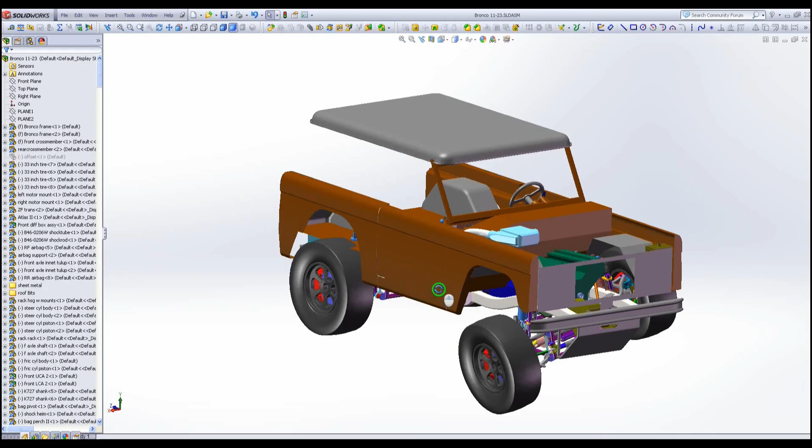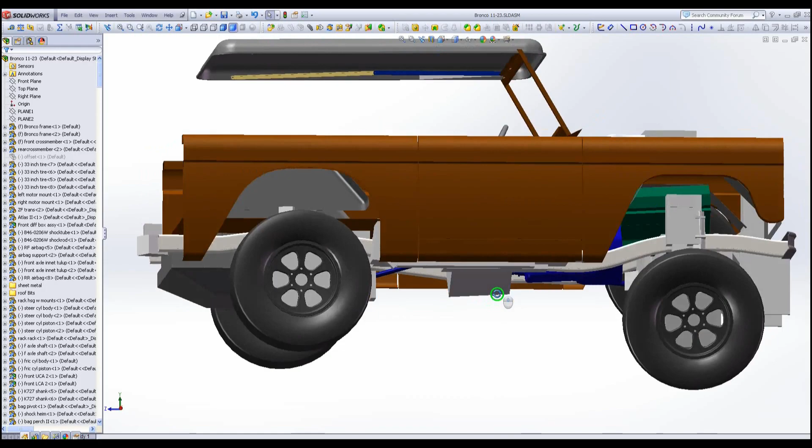So this is the CAD that I have for the Bronco. This project's been going on for many years, but I've been working full time, so I haven't had a lot of time to make progress on it. Some of you will recognize the CAD and the color of the Bronco out in the shop, and some of the suspension stuff. That doesn't just grow that way - I kind of noodle it out here and figure out where things are going to fit and what the suspension geometry is before I get too far.

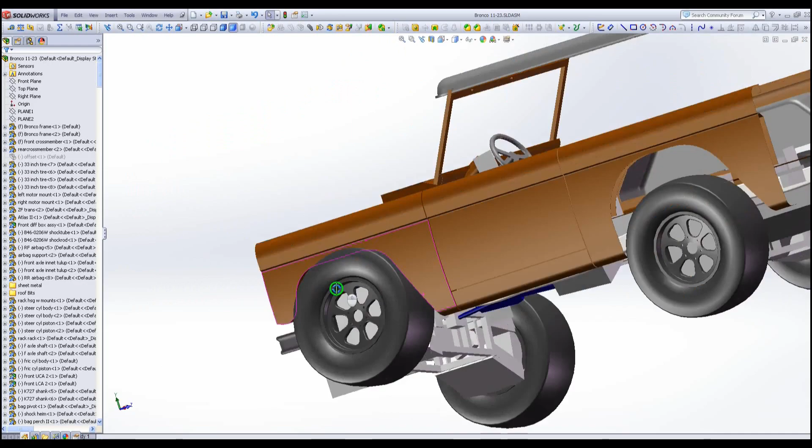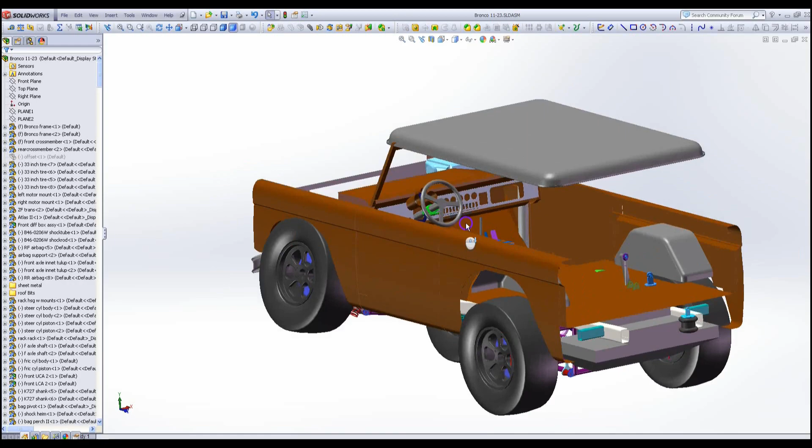So I'm going to kind of twirl this around a little bit, zoom in and out and kind of explain what I'm doing and why I'm doing it. Some of the stuff you'll recognize if you've been to the Batshit Bronco Facebook page.

There's some posts on there that I'll get into maybe a little later, but this is the gauge cluster - there's a post in there on that. This crazy shifter, I think there's a little video in there on that. Maybe I'll make those all into a YouTube video.

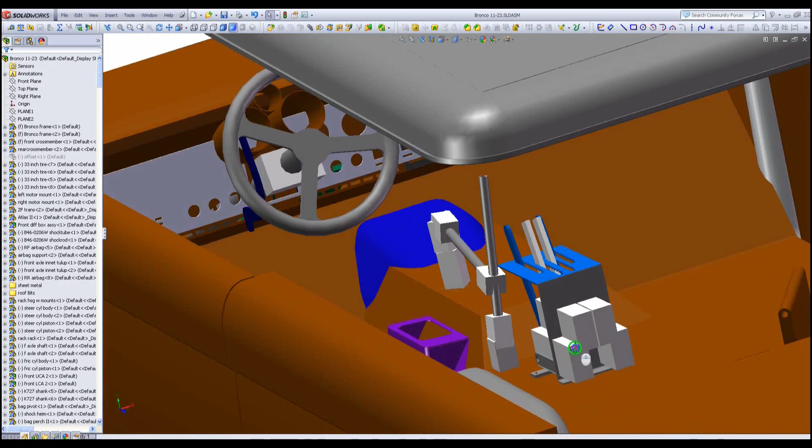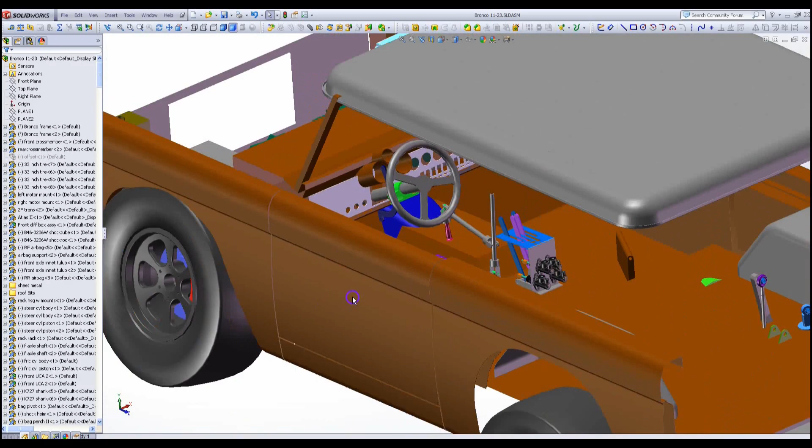Let's see, so I'm gonna just jiggle this around a little bit, kind of show all the pieces, and then I'll kind of take some of them out of there.

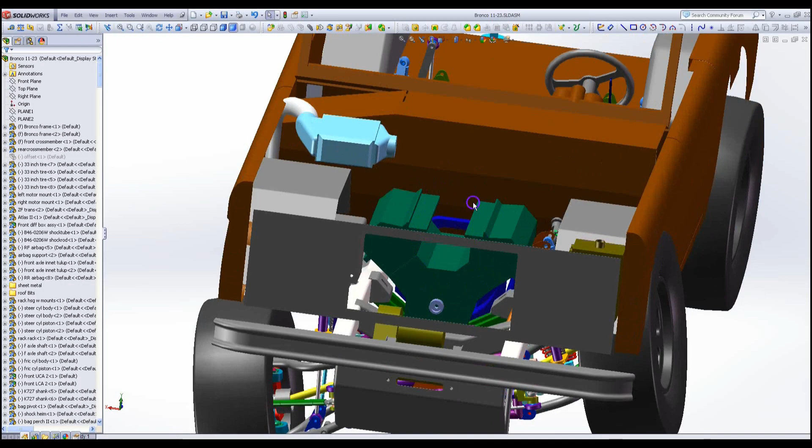This is a gross simplification of a 4.6 two-valve motor. There will be an Eaton supercharger on top of it, as well as a GT42 ball bearing turbo - not compound.

So the supercharger provides boost to the motor up to about 8 pounds-ish. As soon as it exceeds that, the only way it can exceed that is when the turbo kicks in - then the turbo will essentially be bypassed. There's a large throttle body in there that will just bypass whatever pumping the supercharger does, so there'll be essentially no pressure from the inlet to the outlet. It'll still spin, but it won't really do anything, and then the turbo will take over. So you get the efficiency of the turbo at high speed and boost at low speed. This thing needs both, right?

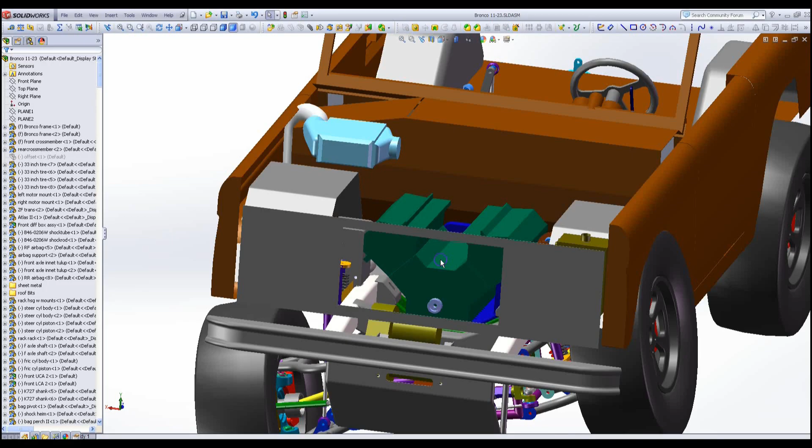You want a lot of torque at low RPM, so 8 pounds of boost at 1,000 RPM is nice for four-wheeling because you always have it on demand. But then you have all the heat generated with it. 8 pounds of boost with an Eaton is kind of pushing the limits of what it's really designed for - it's really designed for like 6 pounds of boost. So you lose 5, 6, 7 percent of efficiency depending on the speed.

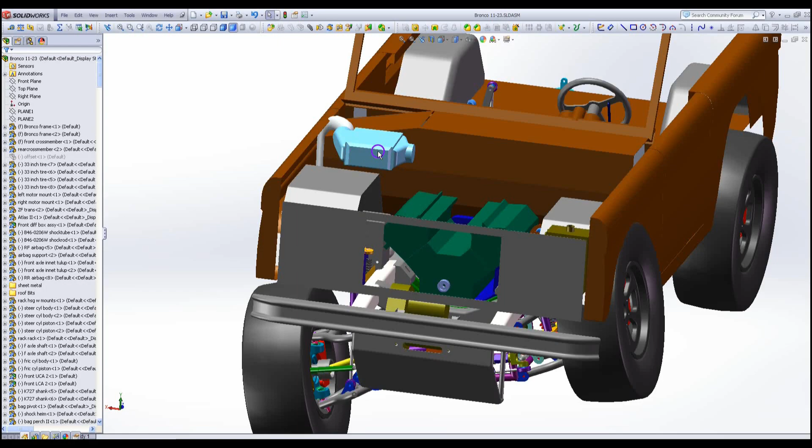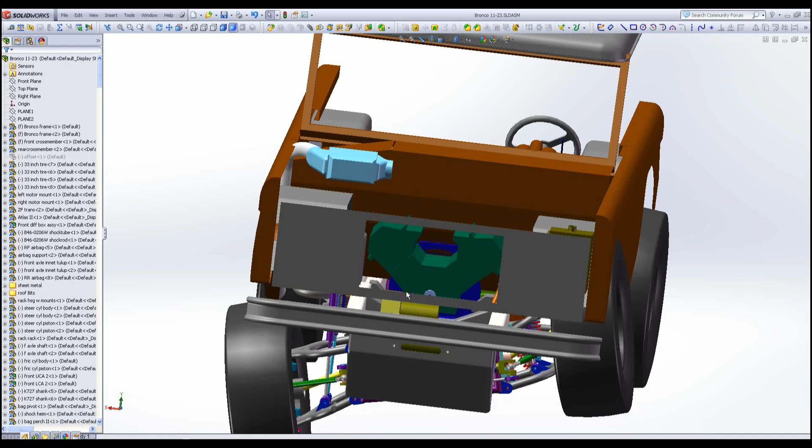Anyway, that's what that is. There's the intercooler there, it's liquid to air. There's also an intercooler inside the manifold - this is the charge air cooler for the turbo, and then there's another charge air cooler for the supercharger. When the turbo is working, it'll go through them in series - pre-cooled by this, then through the intake and cooled by the second one as well. No additional heat will be generated, or very little, by the Eaton supercharger.

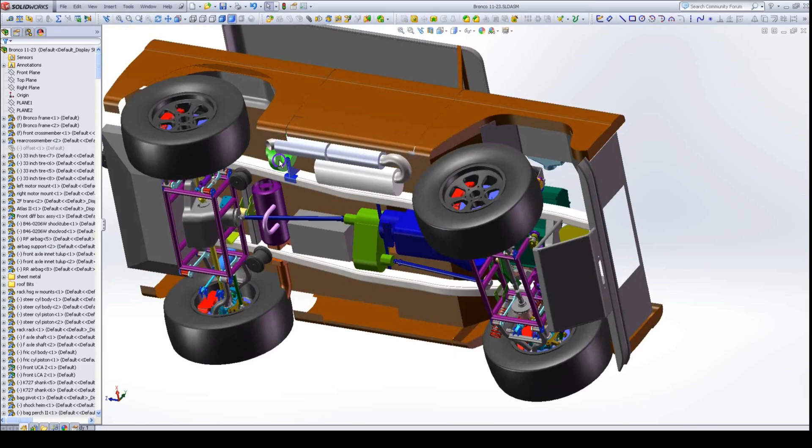I don't have the turbocharger drawn in here because I don't have a good model of it, but that's essentially there's the mount for it - I had to make the mount. So that's the mount for the turbocharger.

This is a simplification of the compressor housing. This is what the exhaust looks like - it's already on the car. This is the air filter, obviously the differentials. The differentials are approximations, transfer case approximation, transmission approximation, right, otherwise the model gets super heavy.

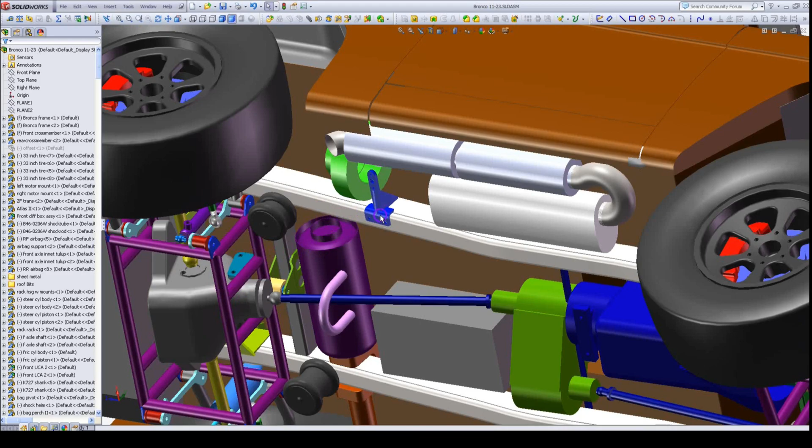Yeah, so I don't know what else we want to zoom in on here, but suspension is pretty unique on this. Some of you will recognize the dashboard. Let's just start hiding stuff here now - get rid of that roof.

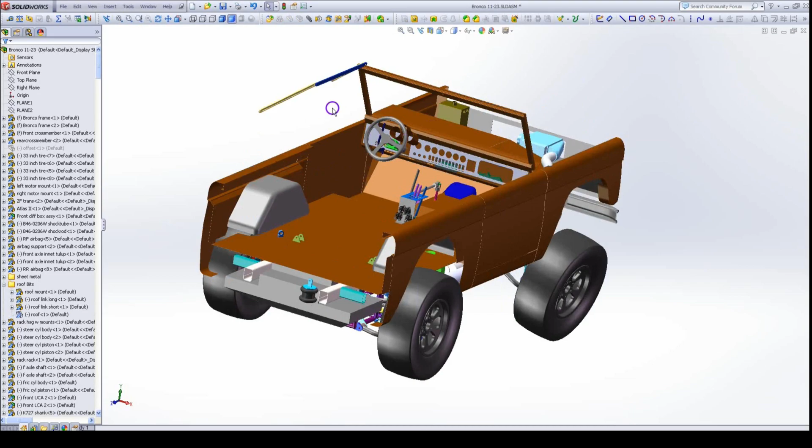Turn this all on later. So yeah, dash panel.

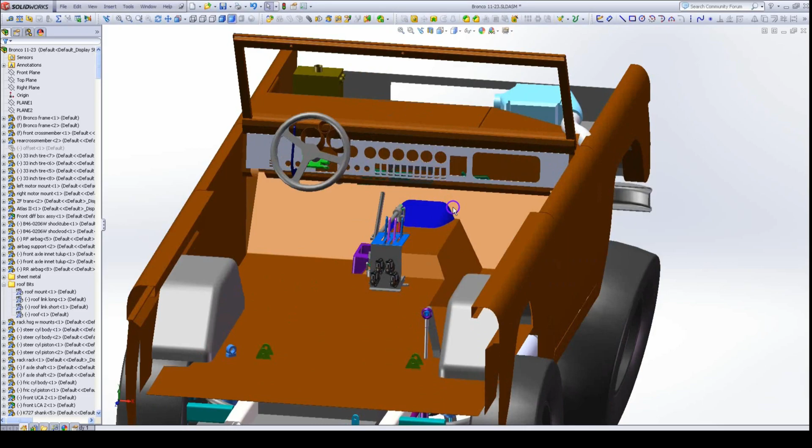So the dash - what I've done is taken the original dash, gotten rid of this cluster over here that sucks because it's kind of really far out of view, and the gauges are tiny on it, and you got to look between the steering wheel and tilt. Yeah, it's just terrible, right? It's one of the worst things with the Bronco.

So I put normal gauges in here, so there'll be oil pressure and speed and RPM here, and then other ancillary gauges - boost and whatever, amperes and volts and yada yada yada. I've also left a bunch of rocker switches for winch stuff and lights and crap like that.

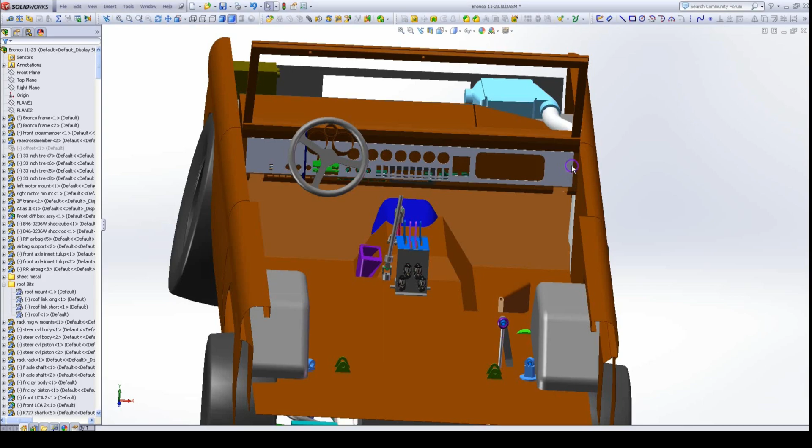I've moved the glove box door over, because one of the major problems with Broncos is when you put a roll cage in it, you can't open the glove box door or the wing window. So I moved the glove box door over, and then the roll cage will be in a more appropriate position.

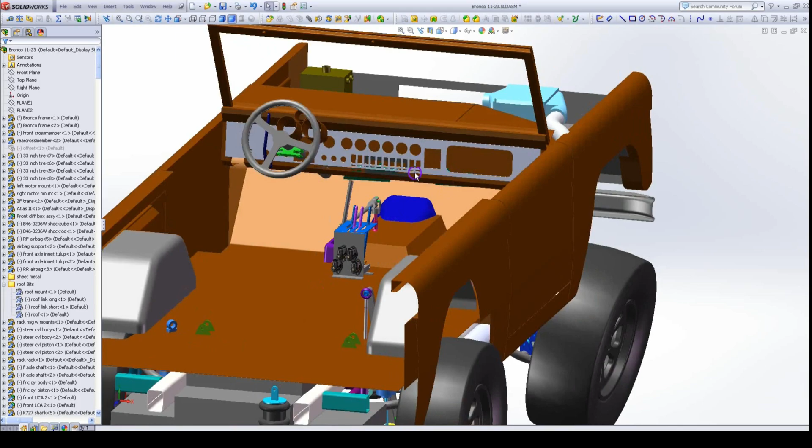So you can open the wing windows. Those are a nice feature of older cars that I don't know why people got rid of, but I like them. I also have some USB plugs for charging phones, and this ashtray is like a cubby for cell phones and packs of gum, whatever you want to stick in there. It's just like a little cubby, no door.

So yeah, let's get rid of the body because that's hiding all the interesting giblets. Again, this is just a simplification of what the real body panels look like.

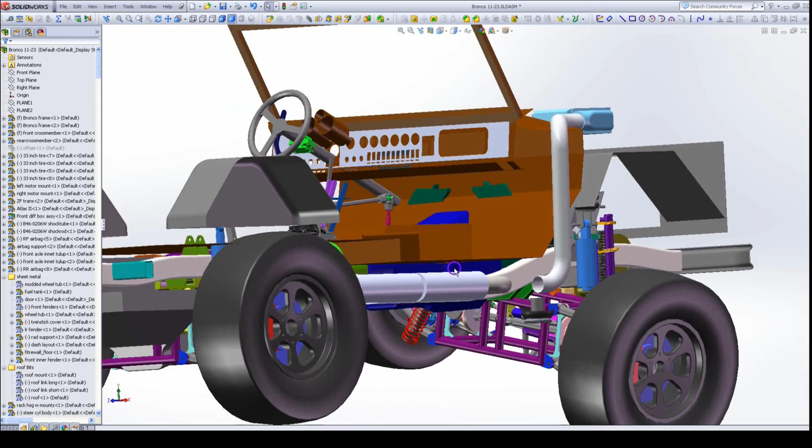One of the other things I've done here, I'm not sure where they're hiding, but I'm using the skid plates as like there's a 3-inch, 3.5-inch OD tube, quarter-inch wall tube going along each side, and one of them's an air inlet, so it'll feed air if you're doing heavy-duty four-wheeling in a lot of mud. It has an air filter mounted up high that feeds air to the air filter down here.

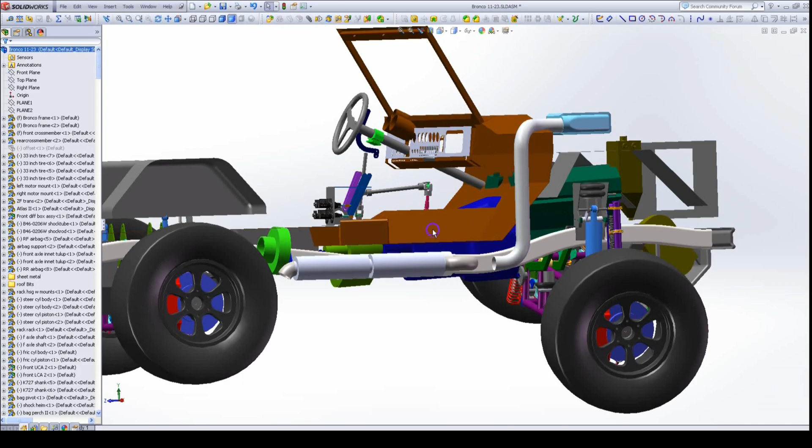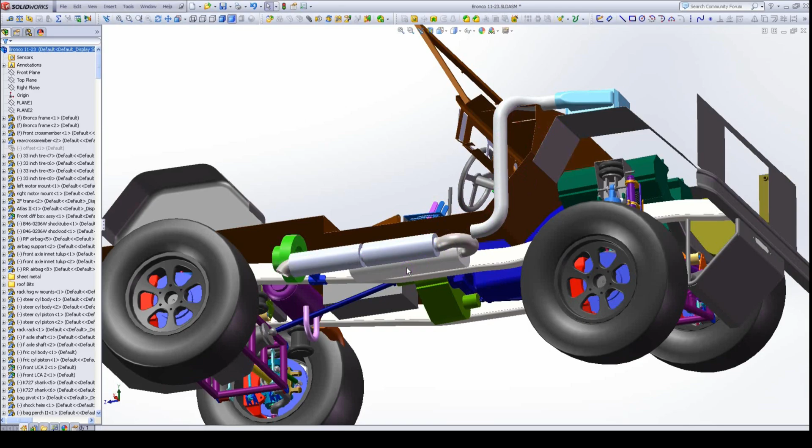This purple thing is the air filter housing, and that feeds into the inlet of the compressor, and then the outlet of the compressor goes to the other skid plate or rock slider, and then it goes up to the intercooler. So that's what that is. So I can delete the intercooler now, at least hide it.

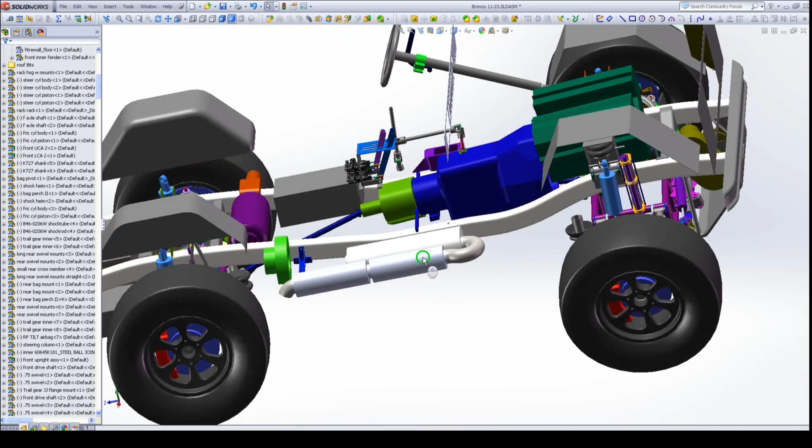We don't need all this. And let's not worry about this guy, that probably won't happen. Okay, so now we just have a dashboard, and get rid of some of this fender stuff.

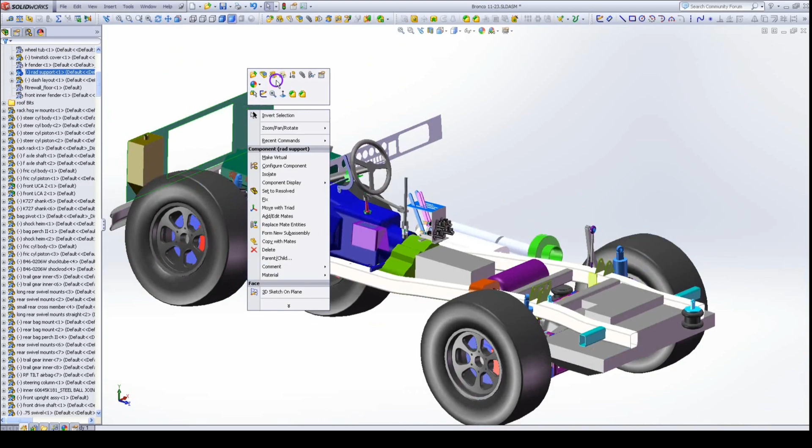All right, so now we're getting down to the nitty gritty. Get the core support out of here. One of the things, if you've already done any serious four-wheeling, you get the vehicle on a pretty crazy angle, and all you hear is tick, tick, tick, tick, tick. That's because your engine's starving for oil.

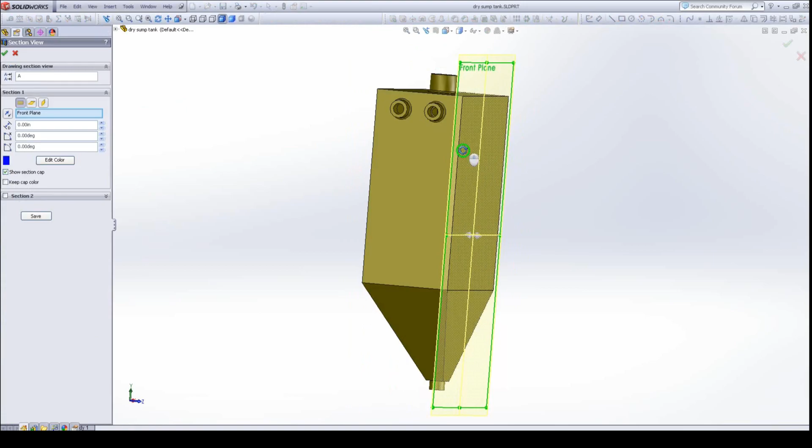So this here is a dry sump tank. This is already built as well. Just open that assembly up. Open. So it has a series of baffles and stuff in here.

So this is just a filler, for the oil. This is the inlet, so the oil comes up through there and then goes to the dry sump pump, which is inside the motor, and then it returns it back to here, and this has a bunch of time to let the bubbles settle out of the oil and go back to here. So this is my own design based on, I don't know, how gravity works and stuff.

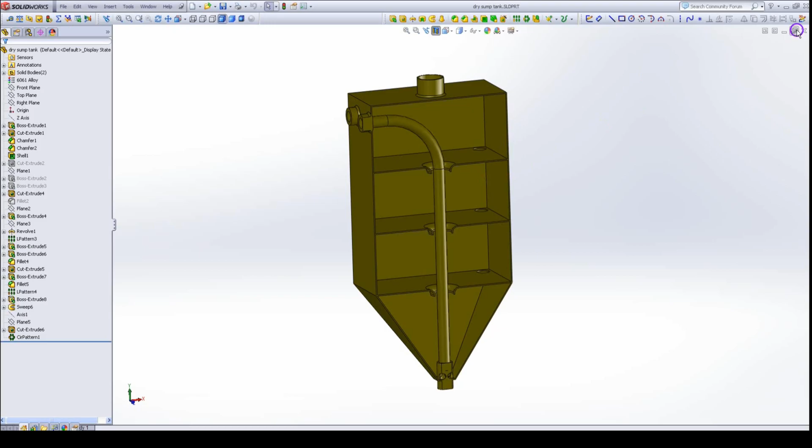I've had that problem on vehicles I've owned and done four-wheeling with, and some that I haven't owned. So sorry about that, A1 Used Cars. My buddy used to work at a used car lot, and one weekend he decided to bring an International Scout home, and we took it up some pretty gnarly trails, and it came back kind of broken. Put it back on the lot, made believe we never borrowed it.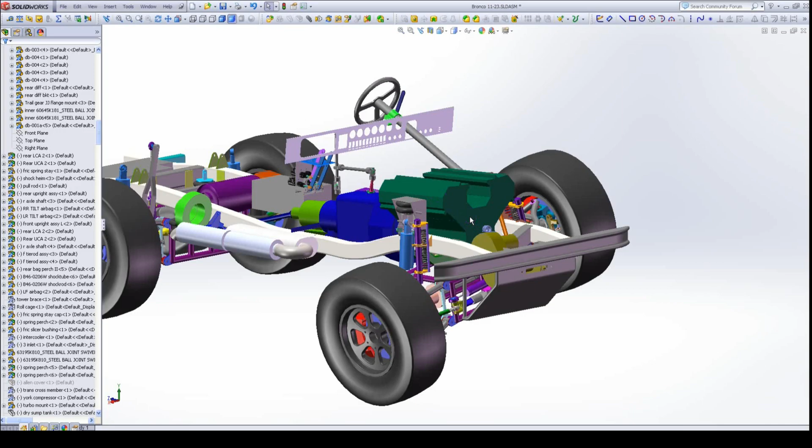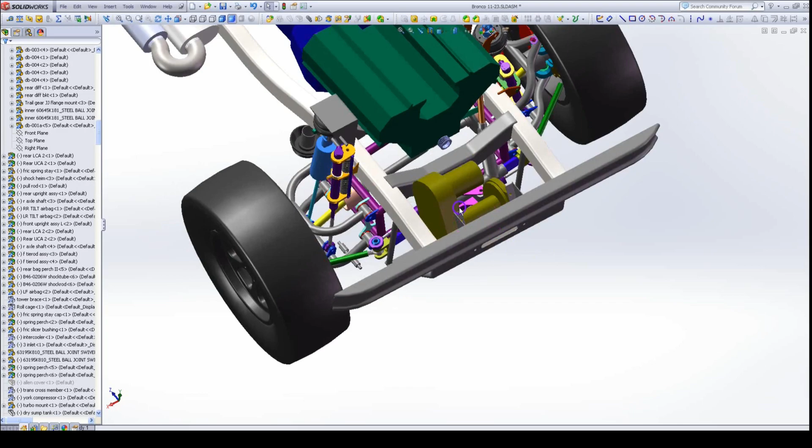So this is an old school Warn winch. I kind of like these, they're kind of built tough. I had one on my Bronco, and instead of letting it hang out of the front and screwing up the CG and bouncing into rocks, I kind of hid it inside here. So that mount is done.

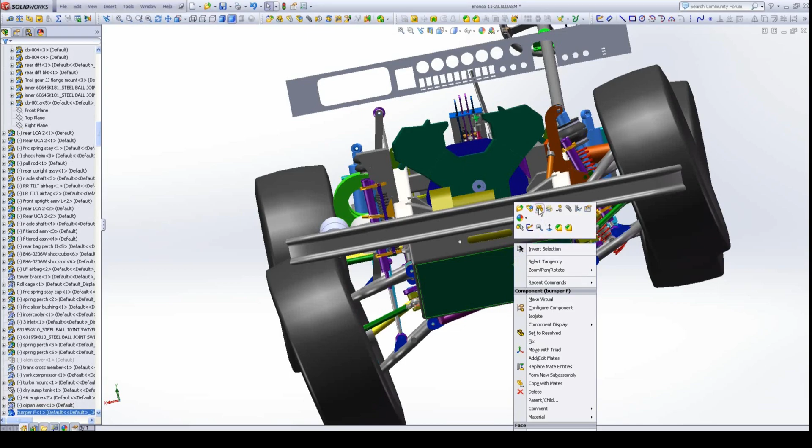I still need to make this guy here, kind of a bash guard. It hasn't been made yet, but I know what it looks like. That guy, hide the winch.

Okay, now we're getting into the nitty gritty. Let's hide this motor, because this is like a little adapter that drives the onboard air compressor. So this is what the front suspension looked like, and the rear is very similar.

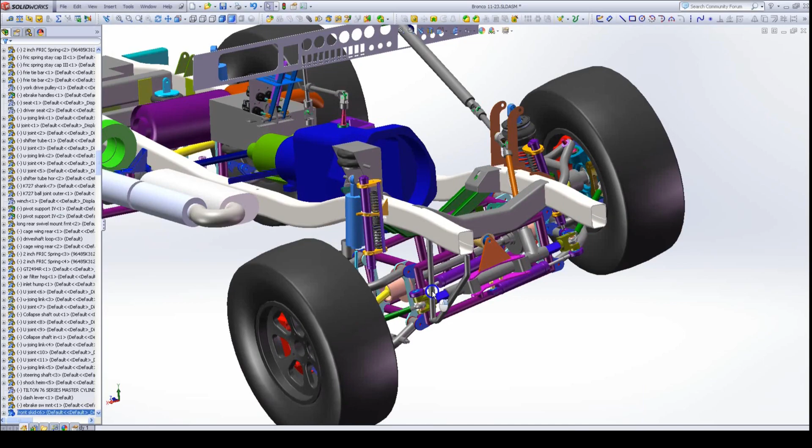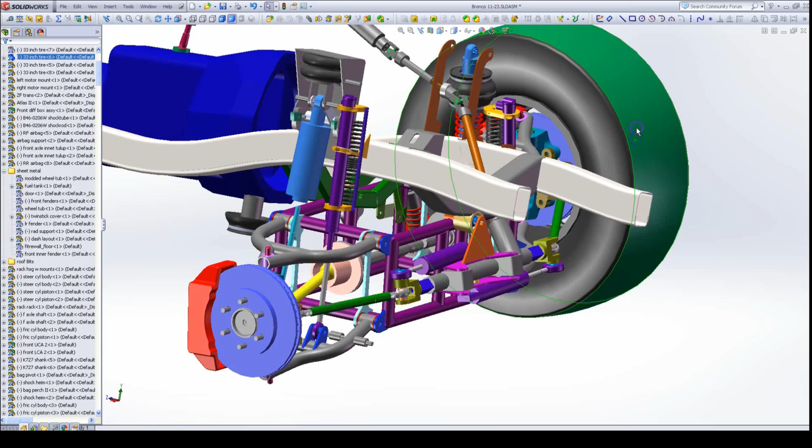So we'll get into the front, and yeah, I'm sure there'll be some questions and comments. Yeah, a lot of stuff happening here. So let's kind of hide - everybody knows what a wheel and tire looks like, so I'll hide those guys.

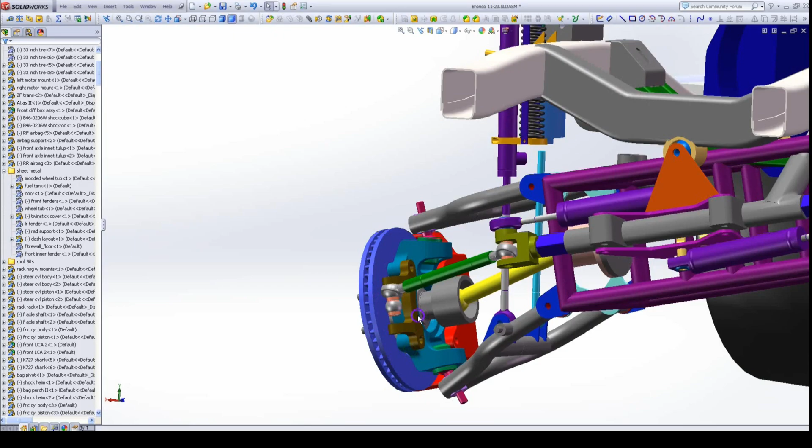So these are Audi or Porsche Cayenne brake calipers. These are Ford F-150 rotors, and this unitized bearing is from an F-150 as well, as are the axles.

Except for, the Bronco's quite a bit narrower, so it's probably going to have a little bit shorter axle. There's two lengths in the standard, and I'm going to try to use one. I'm trying to use the short one, but I think it's still going to have to be a little bit shortened.

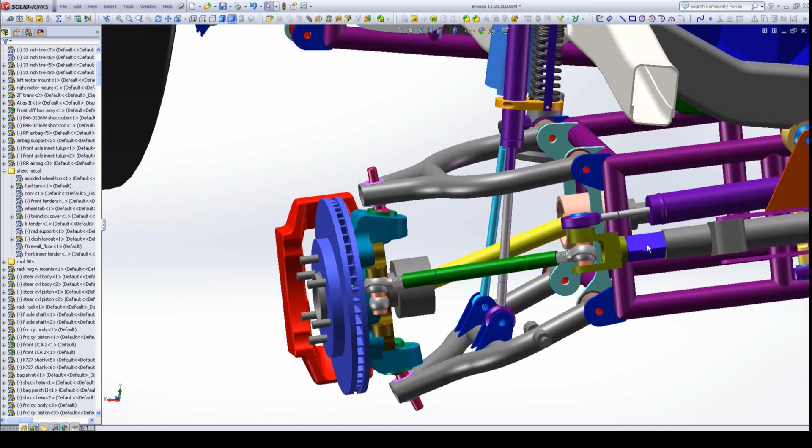Let's go back to the general design of this thing. So instead of having a live axle, I have an independent suspension that's mounted to what I call a diff box. The differential is mounted in this purple box here, and this purple box rotates relative to the frame. Then all the suspension arms are attached to that. So when you're just driving on the street, not doing any articulating requirements, you have an independent suspension.

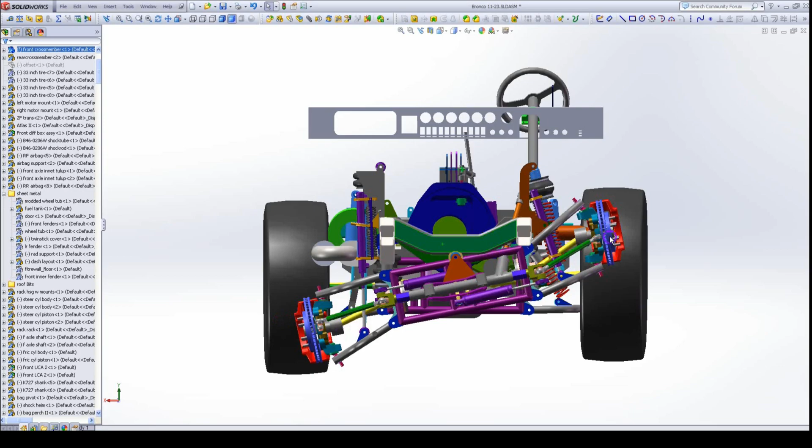You have, I think, about 8 inches of travel. It's been a while since I've looked into the details of it. So you have 8 inches of travel with this thing articulating zero. If that was just locked to the frame, you'd have 8 inches of travel, which is not terrible, but not great either. But when you start doing rock crawling or something where you need to flex, this box can rotate, and it looks like it's rotated about its maximum position here, where it's just getting close to the frame, and it's not that much - it's like 11 degrees or something. It's not a big number, but 11 degrees over a 7.5 foot wide vehicle gives you a lot of extra articulation.

So that's the concept that I'm using here. I get the ride quality and all the benefits of an independent suspension without the detriments, right? We still can flex a lot and have a lot of articulation.

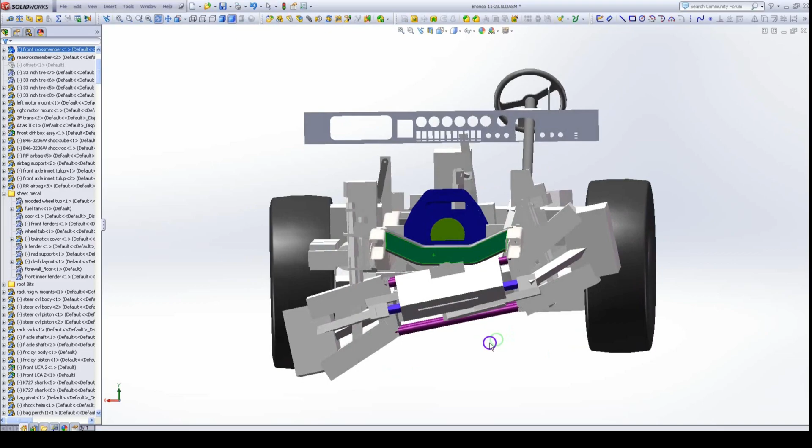There's also some challenge with it, of course. Your steering - there's a rack and pinion steering, so that's mounted to the diff box as well. There's the steering shaft going to it, so this has to plunge, right? The steering shaft has to plunge, which is pretty normal for a steering shaft to do, but this has to plunge a lot now.

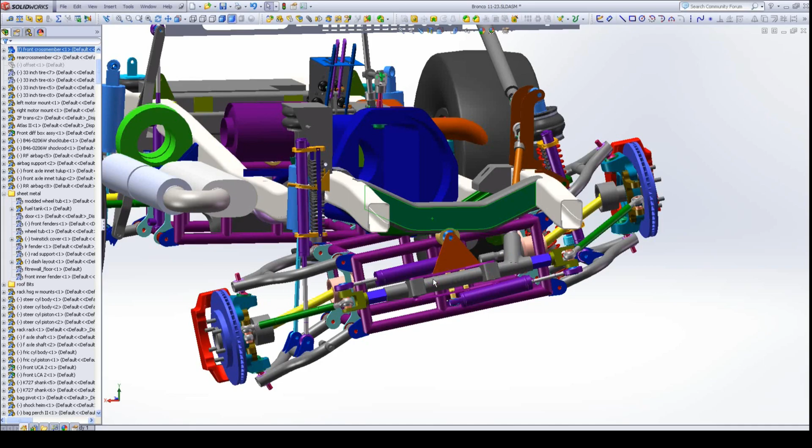Instead of using the steering box to take all the forces from the sides of the tires, which typically is a failure point, I have some hydraulic cylinders in here. There's actually spool valves inside here. If you don't know what a spool valve is, it's basically a torsion bar on a valve. So as soon as you put some steering effort into the steering wheel, depending on which direction you're applying torque, it opens holes a different amount. It either puts fluid to this side of it or this side, and this whole steering rack is the hydraulic cylinder.

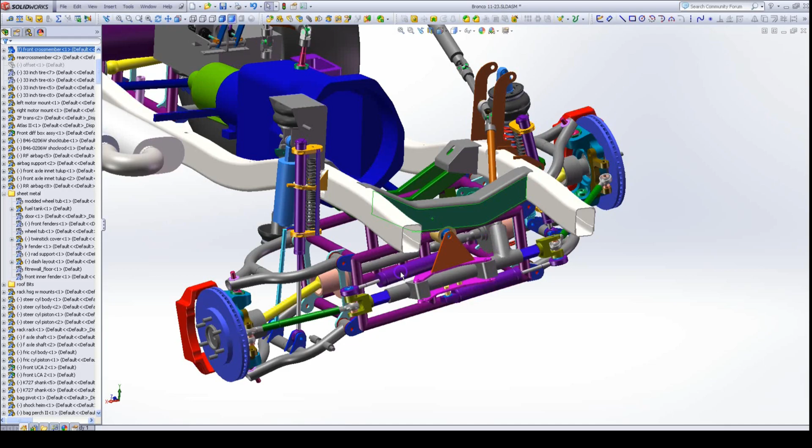So I'm just using the spool from the steering rack, and there's external lines that run anyway, so I'm just running those external lines to this cylinder and to this cylinder. The hydraulic pressure from the power steering pump goes into the power steering rack and pinion, and then it goes to this steering rack or this steering rack, which is now a hydraulic cylinder. That's connected directly to - I used to use an NX at work, so this mouse is backwards, but anyway - it puts the load right into where the tie rod is.

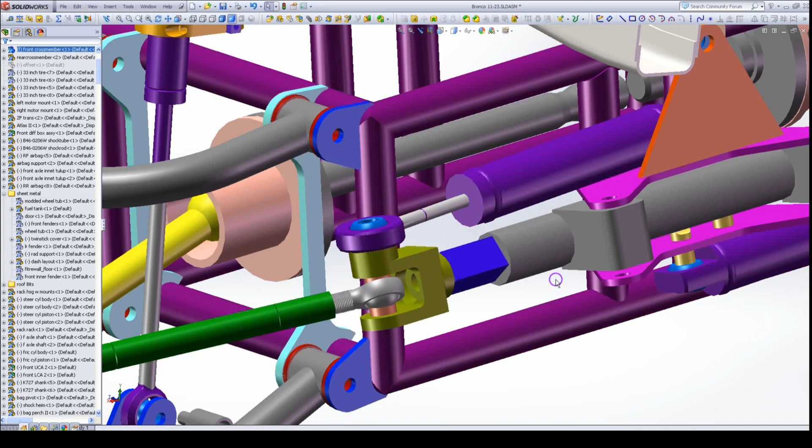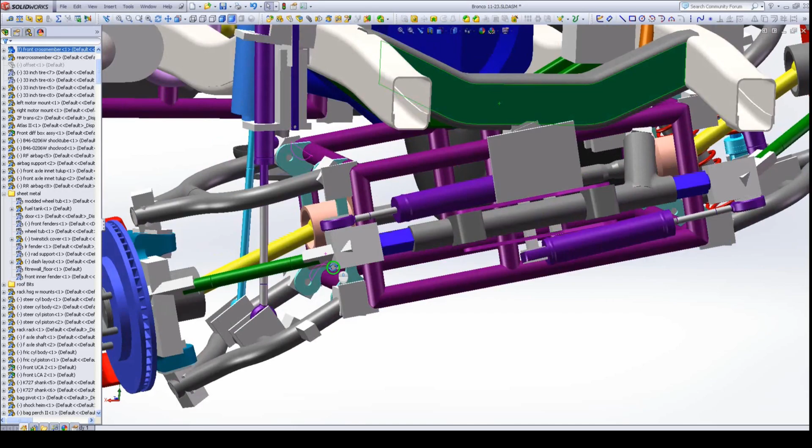So all these parts I've had to fabricate, and most of this stuff is built now. I have these cylinders, I have the rack. I shortened one side of it because it used to be offset, and now it's less offset. So that's the basic gist of the suspension.

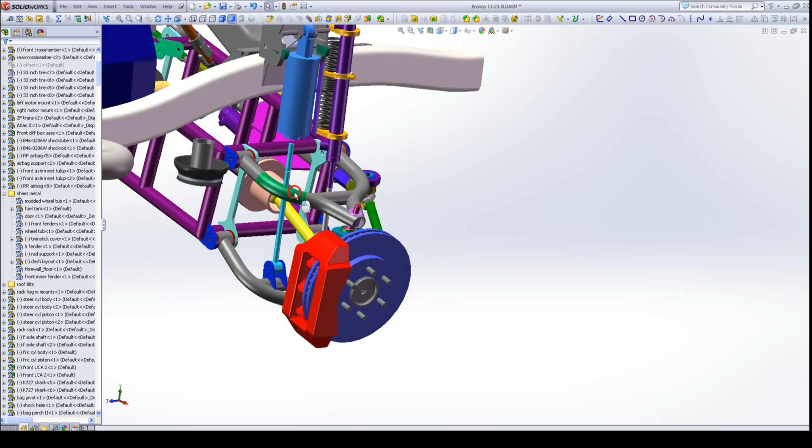Well, there's a lot more. You notice there's a whole bunch of springs and shocks and things laying around here, so we'll get into those as well. It looks like I'm a little bit far out of my travel here.

Another interesting piece of information that many of us know, many of us don't - when you're driving on the street, you want a fairly stiffly sprung vehicle. Otherwise it's not very stable at high speeds, it's big and floppy. Typically, if you make a really hardcore wheeling machine, you put some really light springs on it, 100, 120 pounds per inch kind of springs, super soft. I don't know if you ever watched the stadium super trucks, but those things lean and pick up tires and stuff because the suspension is just really soft.

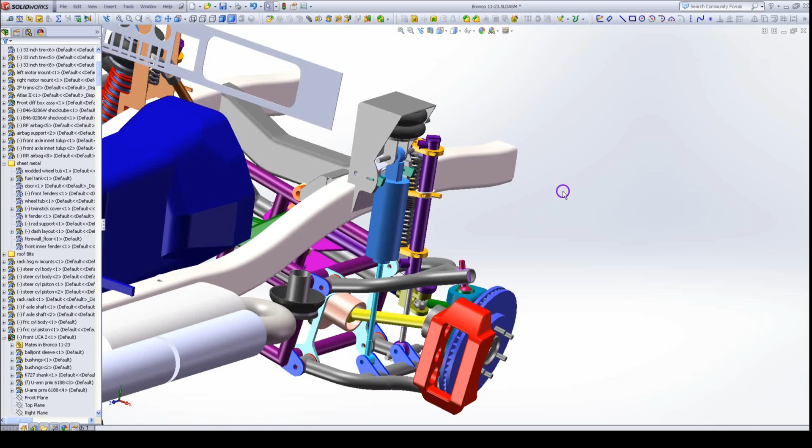And that's not good for the street. It's good for off-roading, good for articulation, good for absorbing big whoop-de-doos. But really, what you want is to flip a switch and have a soft spring when you're off-roading, or flip a switch and stiffen it up for when you're on the street. So what I've done here essentially does that, and changes the ride height at the same time. Actually, that's an older version of the design, and this is the current design, so ignore that other side.

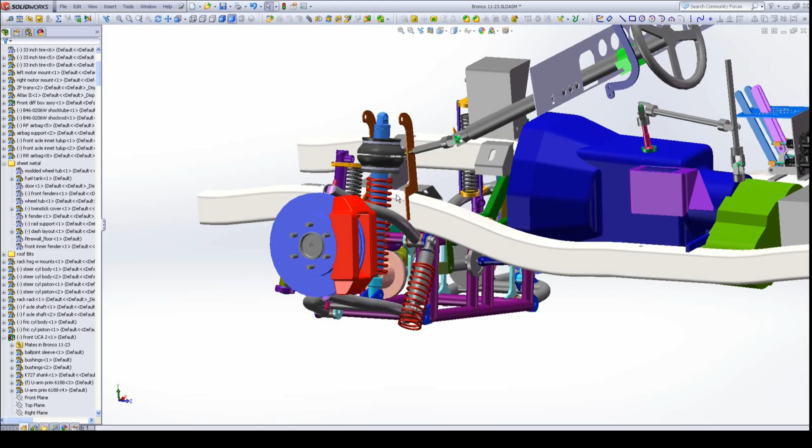Let's go down out of the way a little bit. So basically, how this works is...

This is an airbag, but it's made for a strut suspension, and this is a Fox coilover, 14 inches of travel I think, and it has the springs in series. This one has a built-in bump stop, so this air spring has a bump stop built in.

Basically, when you're on the street, you just let the air out of this airbag, and then this just acts as a solid block, right? It's not part of the spring-in-series solution. All you have is this spring right here. So you can make this spring fairly stiff, right? This could be 400 pounds per inch or 350 pounds per inch.

I have a spreadsheet somewhere that says what I'm going to start off with, but it doesn't matter, it can be stiff. It could be enough to cruise along 80 miles an hour and you're not worried about a little gust of wind tipping you over.

And then when you want to go off road, you fill up the airbags, and then now instead of this spring acting on its own, you have this spring and this spring in series. The way springs add is if this one's 300 pounds and this one's 300 pounds, it's the addition of the inverse of that. So let's say, to make the math easy, if this was 200 pounds and this was 200 pounds, you put two of them in series, now it's 100 pounds.

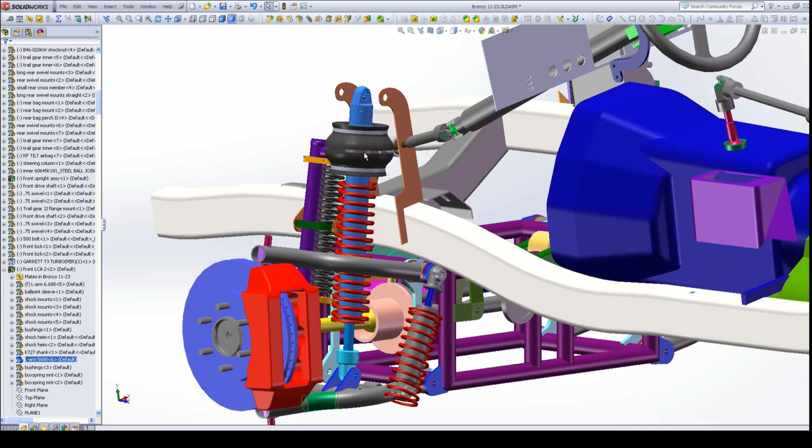So that's what I've done here. Not only do you get a higher ride height when you're off-roading, but your spring rate essentially drops in half or less than half, depending on the air pressure in this. So that's a nice little benefit - you get both at the same time. Put some air in this, it raises the ride height. For off-roading, you get more ground clearance and more articulation, but you also reduce the spring rate.

This spring, I'm not sure why that's in the wrong spot, but links... this spring's sole purpose is to keep this diff box centered.

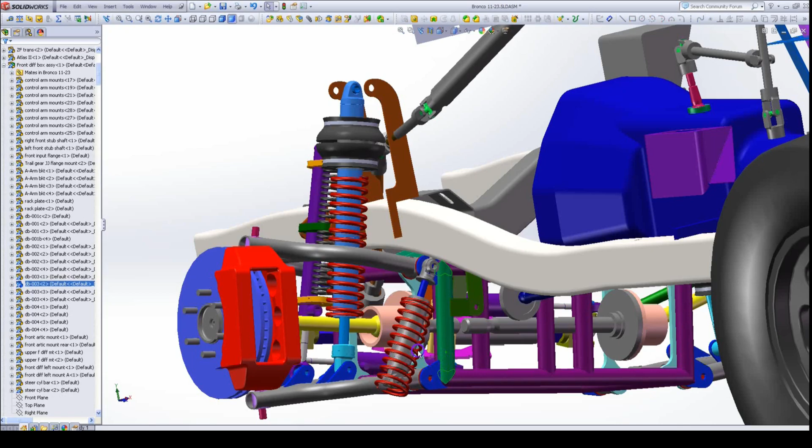So it's like a righting spring, very light spring, but you have to have something to keep this diff box so it doesn't just kind of meander this way, that way, the other way. So that's 4 of the springs.

You'll probably notice that there's some other springs in here as well, and another cylinder. So this is a FRIC cylinder.

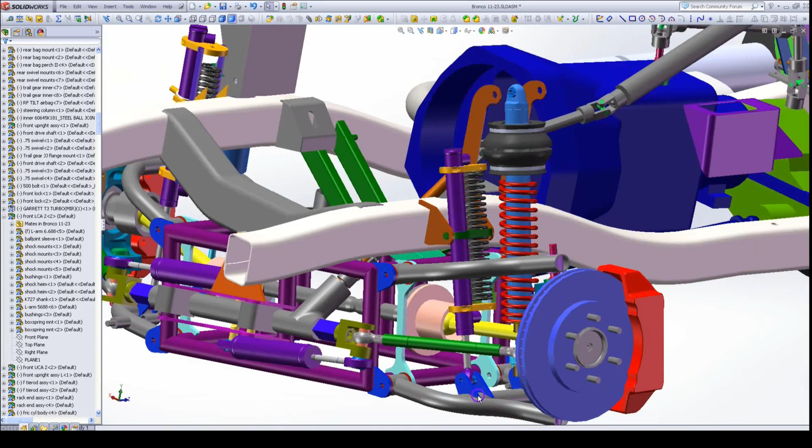And yeah, I'm sure there's some blank stares going on right now - what the hell is a FRIC cylinder? Well, front rear interconnect is what it stands for.

So basically this is a hydraulic cylinder, and there's another one on each corner, but there's another one that has hydraulic lines running from this one to - this is the left front, so the right rear is its partner. So front rear interconnect, but it's diagonally interconnected.

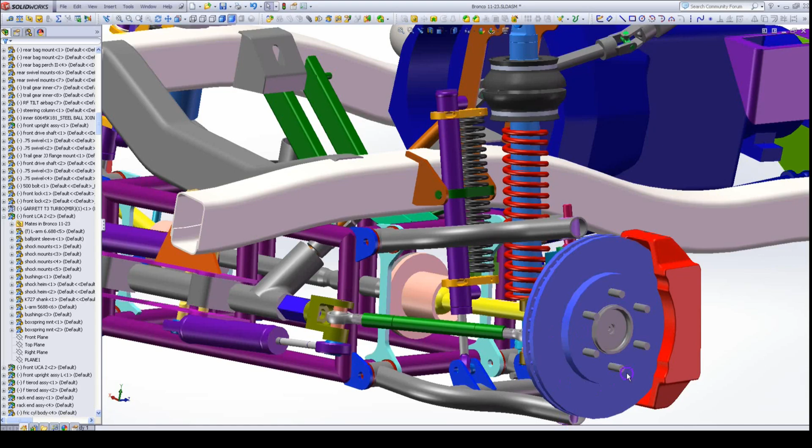So what happens is when this wheel bumps up, it pushes fluid through this, and then that fluid goes to the right rear wheel, and it pulls it up. So when this one goes up, it tries to pull the opposite corner up. When this one goes down, it tries to pull the opposite corner down.

And if you think about how that would work as a system, it works when you're trying to articulate over - like you have sway bars still, right? So if you're trying to go around a corner on the street, this one's trying to compress, so it tries to pull this one up. This one's trying to compress, so it pulls this one up. So basically all you get is a lowered ride height. It works just like a sway bar, except they're coupled diagonally.

So when you're doing acceleration or braking, you get anti-dive and anti-squat, right? If you're putting on the brakes, the left front is trying to go up, which is going to pull this one up, and this one's going to try to go up, and it's going to try to pull this one up. So you get an anti-dive scenario and you get an anti-squat scenario.

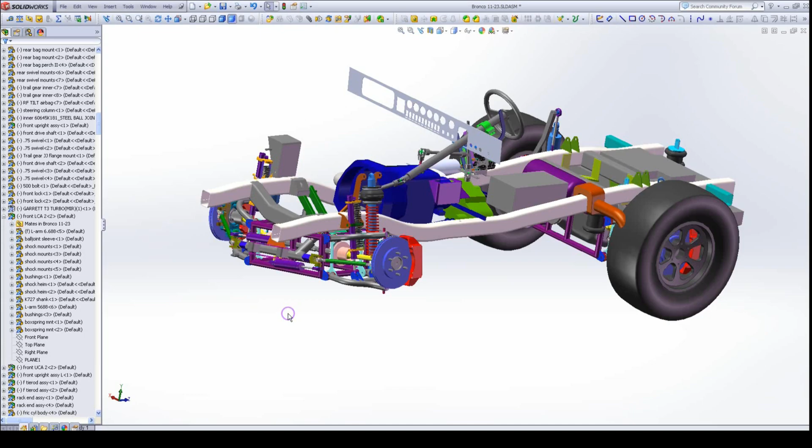So I don't know why everybody on the planet doesn't do this, because I think it's just expensive, but that's what I'm going to do.

So that's what these springs and shocks are for. It needs springs because if you didn't have a spring and only had hydraulics, it would be a one-to-one movement. If this moved an inch on the left front, then the rear would have to move 1 inch. It would be mechanically coupled, like having an infinitely stiff sway bar, which obviously doesn't work. If you have an infinitely stiff sway bar, you might as well have infinitely stiff springs.

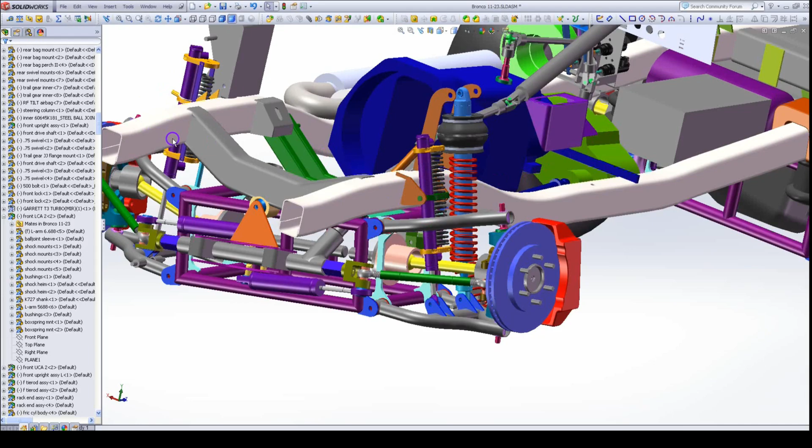So these coil springs are acting like the twisting of the sway bar, which is why you only need them on one end. The rear doesn't have these springs, it just has the hydraulic cylinders. That's how the fric works.

The rear suspension is very similar, except instead of the fric cylinders being mounted the same direction, they have to be opposite, because you have to put fluid...

The way hydraulic cylinders work is there's a piston that's, say, an inch, and then on the opposite side where the rod comes through the seal, say that's a half-inch rod. Now you have a 1 inch cylinder minus the area of that half-inch rod, so the ratio isn't the same from this side to that side. So if you wanted similar travel for the same fluid, you have to make one a pusher and one a puller, or you have to have a seal on both ends.

You'd have to have a seal on the top and the bottom, front and rear, and I didn't want to do that because that seal creates another leak path. Plus there's a big rod sticking out of it that would poke through the hood and stuff. So that's why I didn't do that.

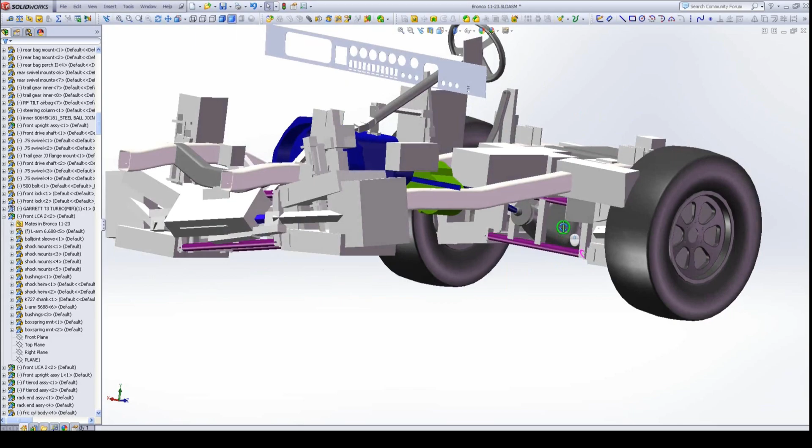So that's the 5-minute tutorial on what I'm doing and why I'm doing it. The devil's in the details, of course.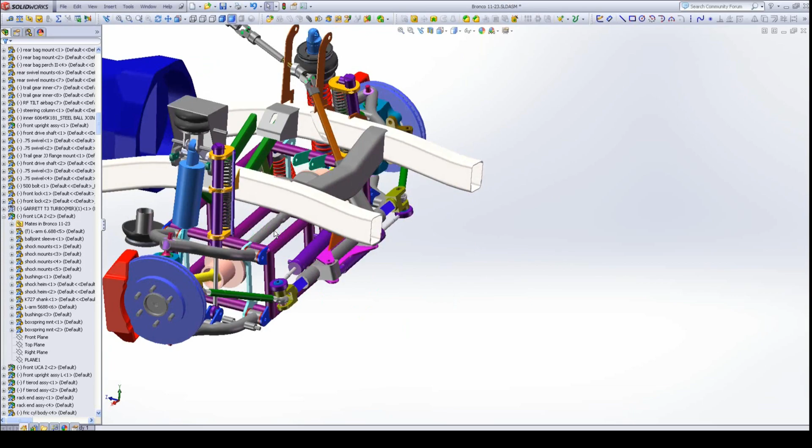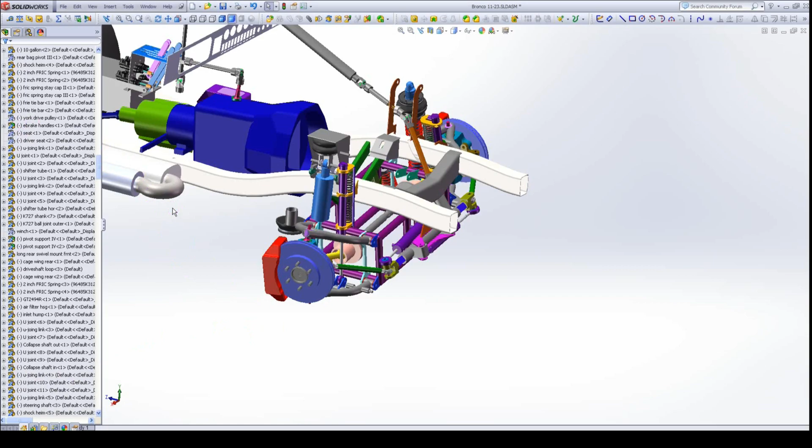This one has a differential, an 8.8 Ford differential. I think I have a picture of it in here somewhere, a representation of it. Anyway, not sure where it is, but the rear is a 9 3/8, I think, like a Sterling Ford differential.

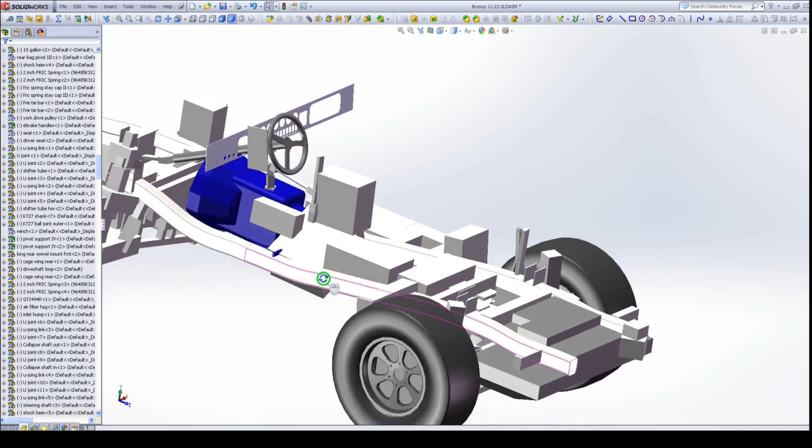Same deal with the airbags though. It has the same shocks, it has airbags. Very, very similar, just the packaging is different.

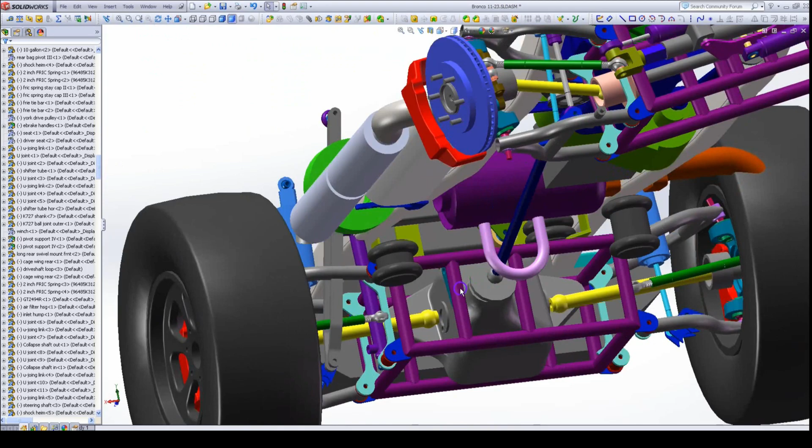This is not ready for prime time. There's a lot of ideas that get chopped up and thrown in here and then discarded, so everything you're seeing is not real yet.

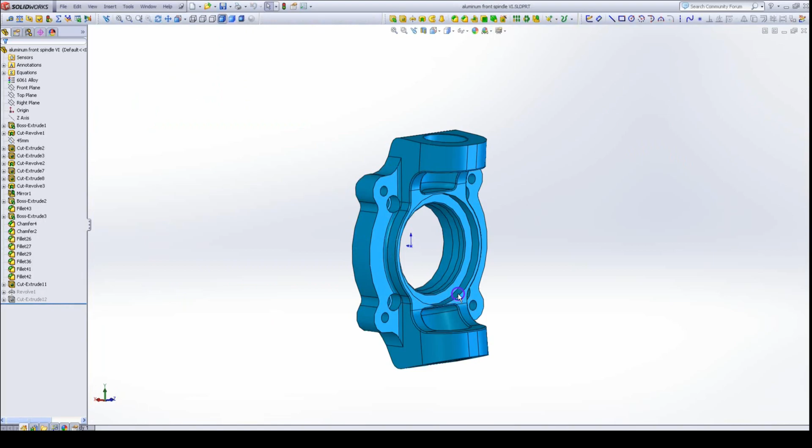One other thing I should mention is these uprights are not something you can just buy. This upright is a custom piece, so I have to make these or have them made. But I've already done the analysis on them, with a factor of safety of like 4, so it should be fine.

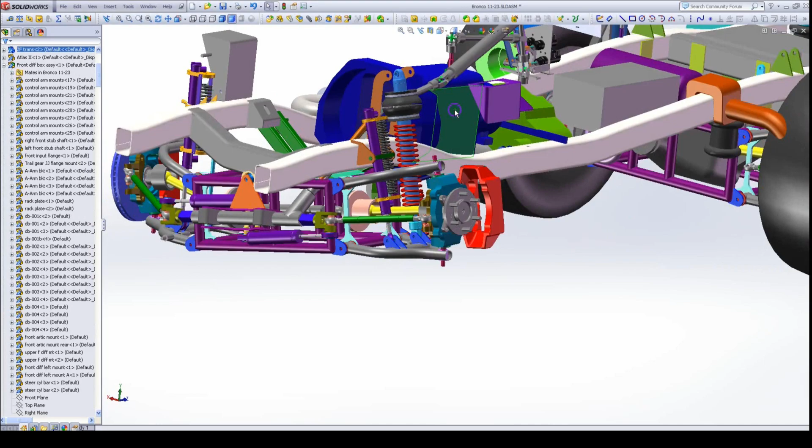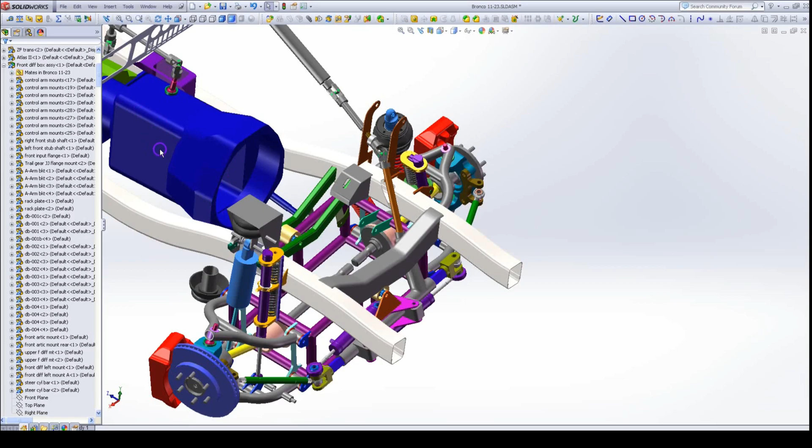Stock frame. This is a ZF transmission, a 5-speed manual, originally intended for something like an F350 with a V10, but modular motors have the same bolt pattern - 4.6, 5.4, 6.8 are all the same pattern - so I got this transmission from a V10. Should be plenty for what I'm doing with it.

This is an Atlas transmission, or transfer case, Atlas 2.

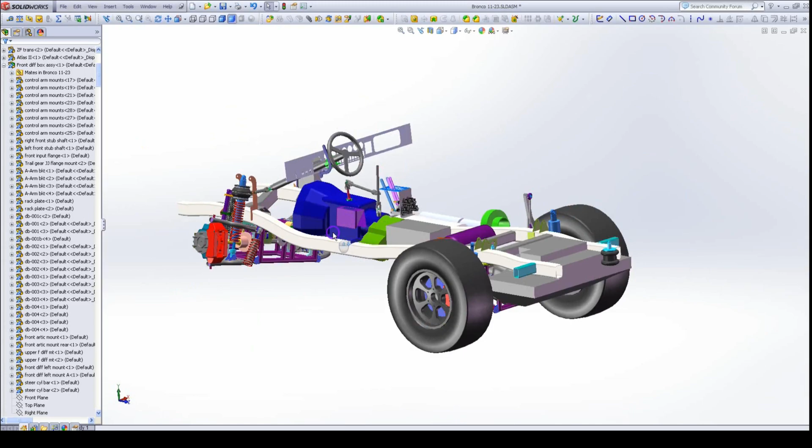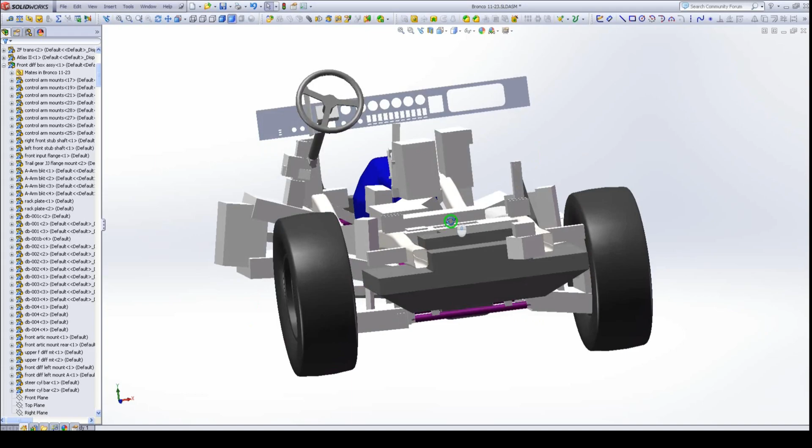That's about it. There's the 44-gallon fuel tank. I didn't really get into that much, but the stock fuel tank is like 14 gallons when it goes in the rear. Most people replace those with a 24-gallon, which is what I have. But then I've extended it - it normally stops here, I've extended it to all this stuff - so now it's like 44 gallons.

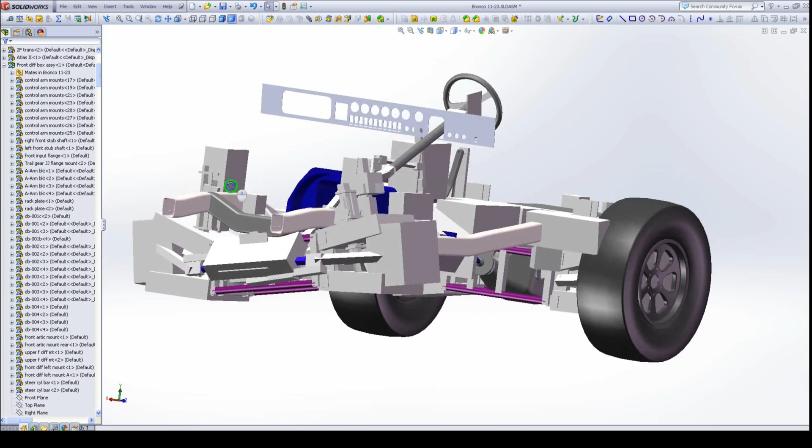So that'll be gasoline. And the stock saddle tank that goes in here will be E85. There's a second set of injectors in the valley, so as soon as you get to 8 pounds of boost, it shuts off the fuel or reduces the flow of gasoline to minimal - they're still on, but minimal. Then the majority of the fuel is E85, so you don't have to pull a bunch of timing out with shitty gas you can buy wherever you go.

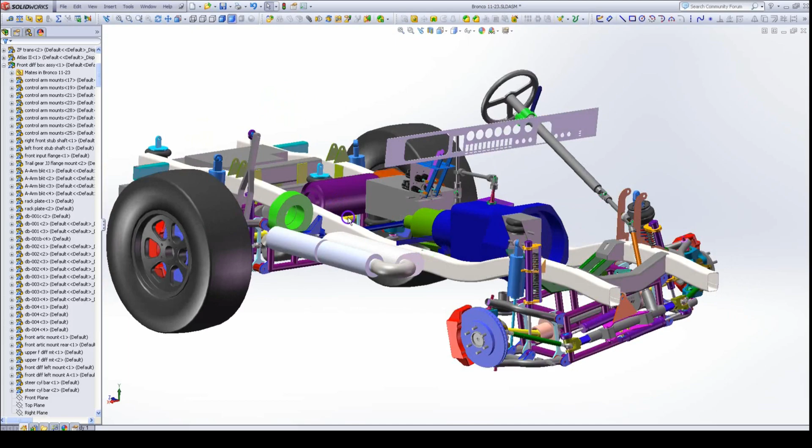I'm sure I'm forgetting about 80% of the intent on this vehicle, but that's probably a good overview.